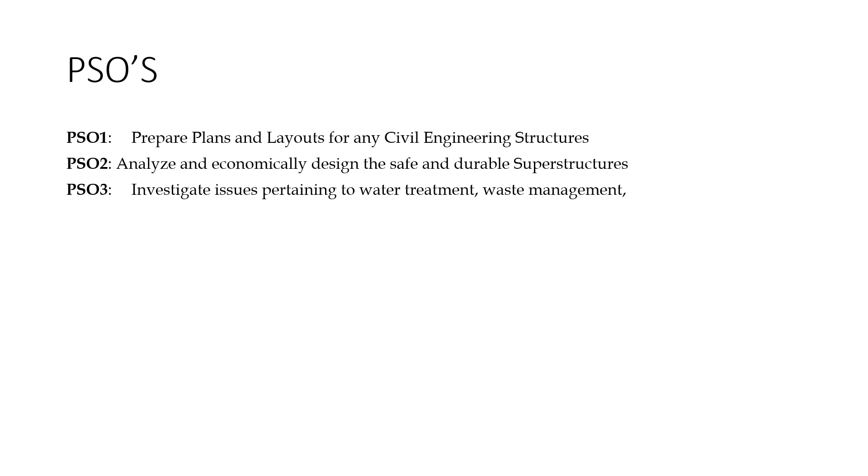Next one, investigate issues pertaining to water treatment and waste management. If you go through the curriculum, most of the subjects come under any of these three categories. So we have included water treatment, waste management related subjects in PSO.

Next one, coming to our subject 22 CEC 61, structural analysis 2. The course objective is analyzing determinate and indeterminate structures using ILD, and analyzing the arches, cables, suspension bridges and plastic analysis. So we can identify the three major divisions. First one, analyzing determinate and indeterminate structures using ILD.

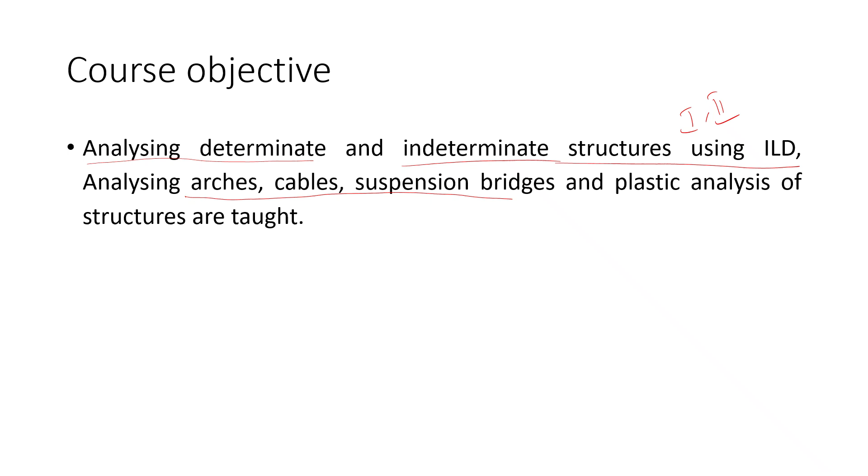So the first and second units will deal with ILD, and the third and fourth units will deal with arches, cables and suspension bridges. So these three components come under a single heading. And the fifth unit will be the plastic analysis of structures. So we can divide it into three major parts.

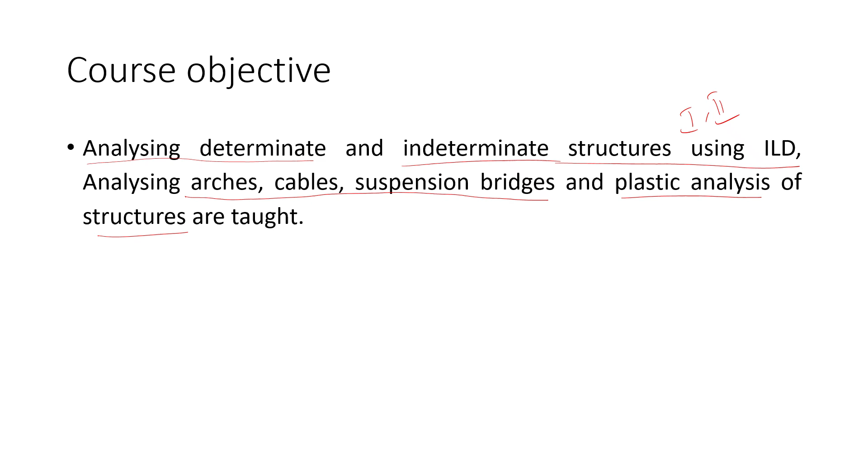Next one, course outcomes. In these course outcomes, you can identify that CO1 to CO4 will be related to any one of the units, and CO5 is not related to a particular unit. By solving the problems, we can give some seminars and it can be evaluated internally.

CO5 is going to be evaluated internally, because if you look at CO1, summarize the concepts of ILD for determinate and indeterminate beams, also summarize the concept of arches, cables and suspension bridges. If you look into the question paper, you can relate CO1 to any unit. In the previous system, we had unit 1 as CO1, unit 2 as CO2, unit 3 as CO3, unit 4 as CO4, unit 5 as CO5.

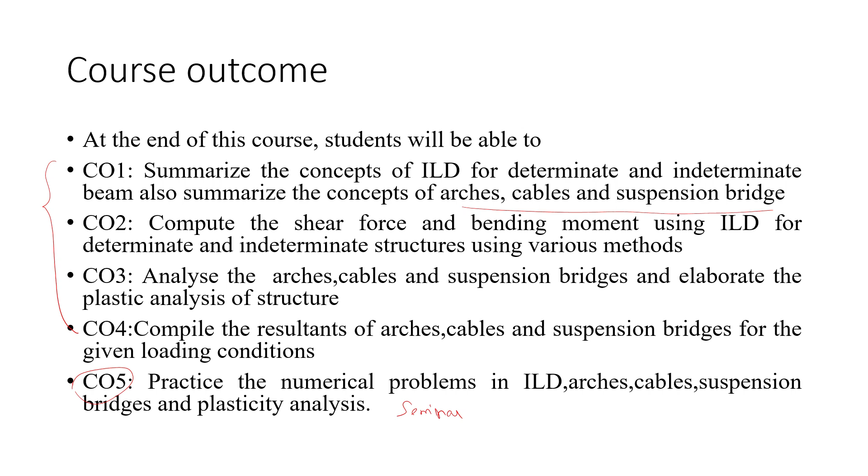But from now onwards, we have changed a lot in the question pattern. So units 1 to 5 will consist of any one of CO1 to CO4. It will not consist of CO5 because it is going to be internally evaluated, but nothing more different than that. The first unit is influence lines for determinate beams.

So only statically determinate beams we are going to consider, only simply supported beams. Next, one part will have an overhang or both parts will have overhangs, with different loading conditions. Actually, this concept deals with moving loads. The load is first in this position, next it moves to the next position, and it further moves to this position. So the load is not considered to be static at a point.

Actually, I am hanging the load above the beam. I am not placing the load over the beam. I am hanging the load over the beam. That is, I am considering that the load is moving from left to right or right to left. And generally, for our comfort, we consider the load moving from left to right.

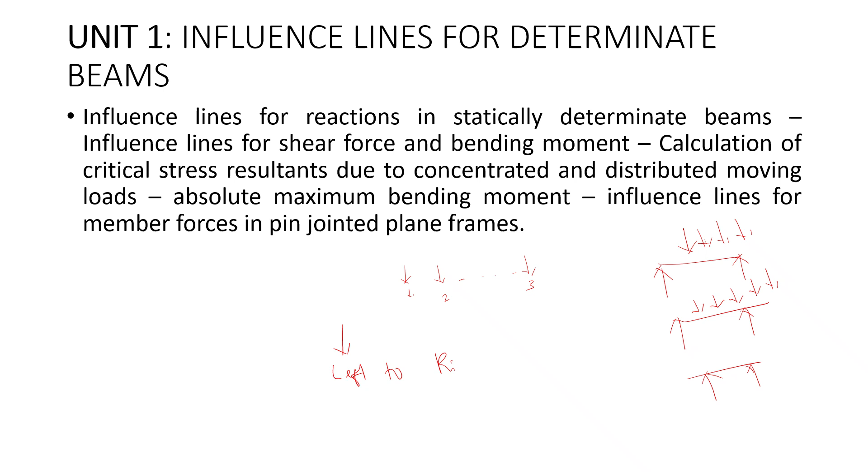That is, if you are considering a bridge, a vehicle is traveling from left to right, and it has a number of wheels. Each wheel is considered to be a point load. Initially this truck will be here. Finally, the truck will leave on the right side.

The wheels are located like this, and the load is applied on each wheel as the axle load. So here it is entering, here it is leaving. So the load direction is from left to right side. So this loading condition is considered to be multiple point loads moving from left to right side of the bridge.

This point load may not be the same in magnitude. Here it can be 50 kilonewton, next one 60 kilonewton, next one 80 kilonewton, next one 20 kilonewton, and next one 20 kilonewton. Why am I giving a lower value of 20 kilonewton compared to the others? Because the material is loaded only at this part. So this point load will have lesser application of load compared to the backside wheels. So I am approximately giving a lesser value for these wheels. So this load is coming as multiple point loads.

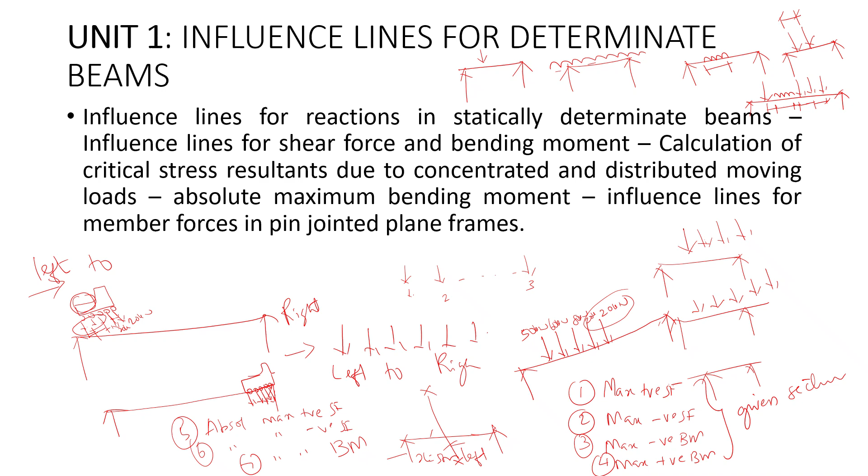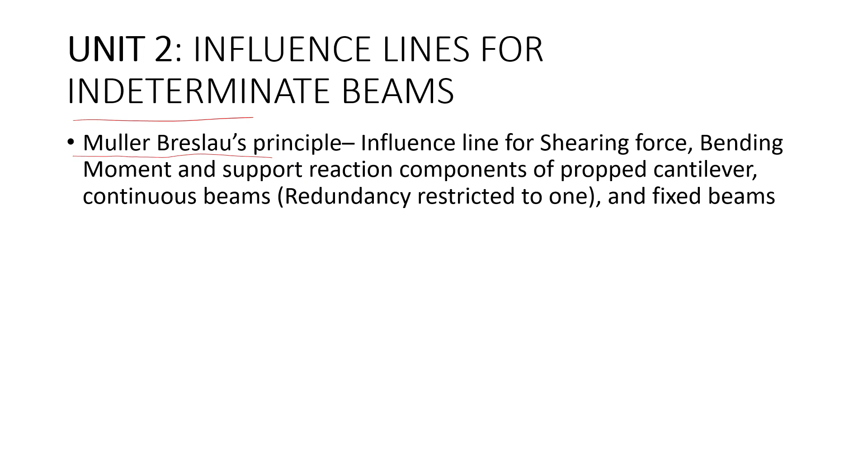So with this introduction, I am moving to the next unit. So this is also ILD, that is for indeterminate beams. So normally the indeterminate beams require some new concept or new principle. So here Muller-Breslau principle is used, and for this if you are taking a propped cantilever, it is an indeterminate structure. So we are going to remove this reaction and we are going to apply 1 kilonewton load in the same direction, and we are going to have some integration in this unit,

and we are going to draw the ILD diagram. So in unit 1 also we are going to draw an influence line for shear force and bending moment diagram. So influence lines mean that here I am considering 50 kilonewton load and I am going to draw the shear force diagram like this. This is negative diagram, this is positive diagram. In the influence line, we are not going to deal with 50 kilonewton. We are going to deal with 1 kilonewton load, and we are going to estimate the same positive and negative shear force at this section

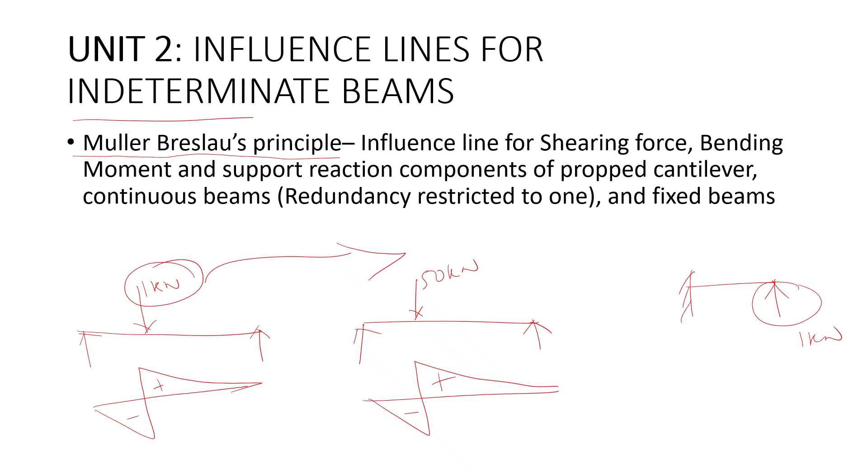with this 1 kilonewton. So it is very easy for the calculation for the design engineers dealing with 1 kilonewton rather than 50 kilonewton. So that is the ILD concept, influence line concept. This is very simple for design engineers, so it is mostly adopted. So in moving load concept, we are going to apply 1 kilonewton instead of actual loading, and finally we are going to multiply the 50 kilonewton at the last step. So we will see one by one while having further lectures.

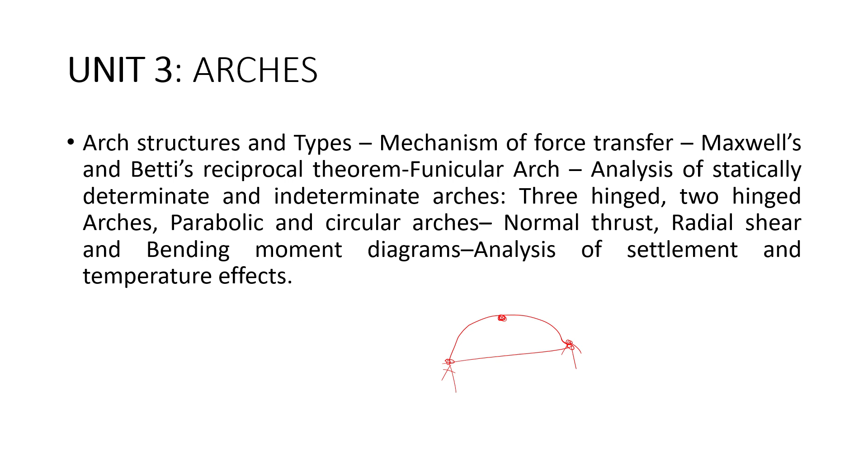Next one, arches. Arches, you already know it is an arch profile. Arch profile will have 2 hinged arch at the supports or 3 hinged arch. It is having some additional hinge at the crown point, and calculating the bending moment and shear force, radial shear and normal thrust also can be calculated. So this is all about the arches.

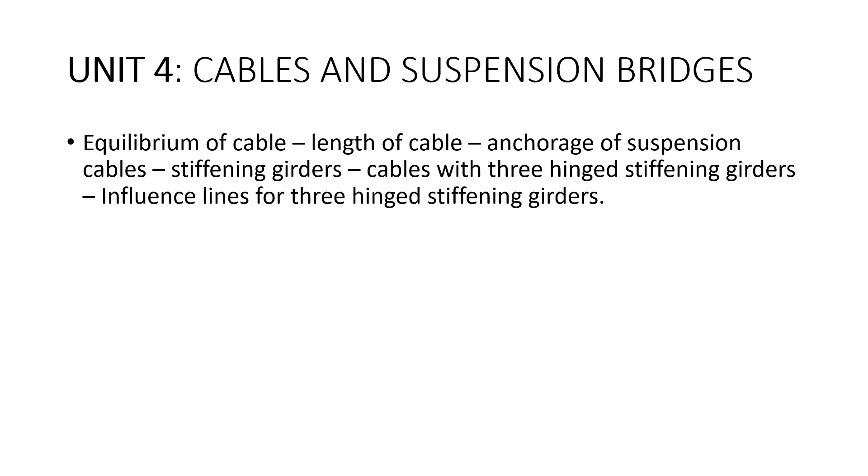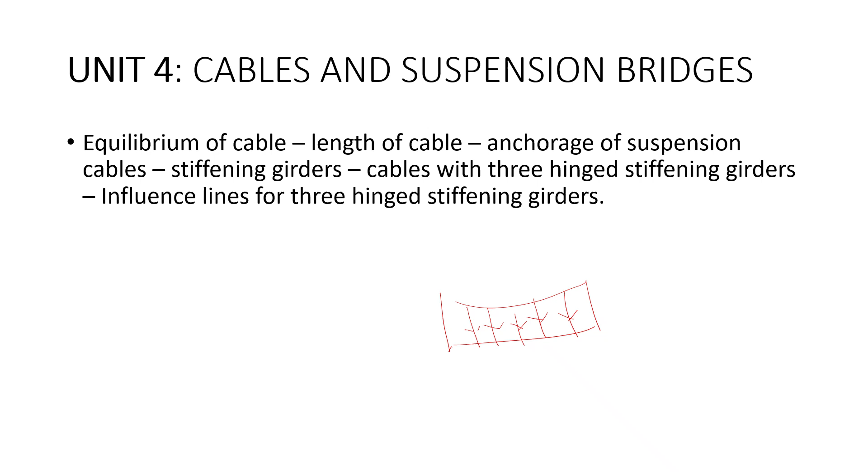Next one, cables and suspension bridges. So we know the suspension bridges are tied with the cables. So each cable will have some tensile force. So we are going to analyze with the different support conditions and calculating the bending moment values.

Next one, plastic analysis. It is completely different from normal analysis, because from strength of materials, mechanics of solids, all analysis problems we are assuming that it is elastic. All the conditions are within the elastic limit. Beyond that, we have one region while we are testing the mild steel. This is the elastic limit where the stress is proportional to strain, Young's modulus, and further this is the plastic region. Before collapse we will have some strain hardening portion. If it is stress, here it is strain.

Basically the stress is increased with the particular strain value. Both the ratios are same within the elastic limit. Beyond this point, the stress is not increasing. The stress is limited, but the strain is increasing. Sudden collapse will not occur. The strain is increasing and it gives some warning. So this portion is called strain hardening portion. So this portion is also called plastic region.

Plastic region comes after the formation of some hinges, because the hinge allows enormous rotation at any point. So this enormous rotation will lead to collapse. So at this point the structure will collapse. So from the linearity point to the collapse, we have the plastic region. So here we can calculate maximum collapse load. Up to this point we will talk about the yield load or yield stress. Here in this region we have to calculate maximum collapse load or ultimate bending moment. We have two theorems, upper and lower bound theorems, to calculate this.

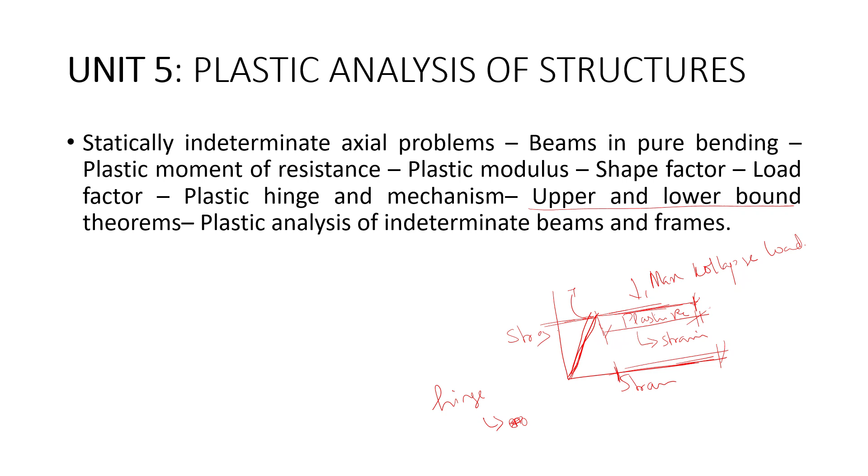Next, CO2 is mapped with PO1. Actually this should be mapped with PO2 only, because PO1 is engineering knowledge. Always we are applying engineering knowledge. So CO2 is mapped with PO1, further CO3 PO2, CO4 PO3, and CO5 by giving seminars, PO9 communication can be employed, and PO10 and PO12 lifelong learning. Here teamwork can be mapped in CO5. So this CO5 can be evaluated internally. It will not be asked in examination.

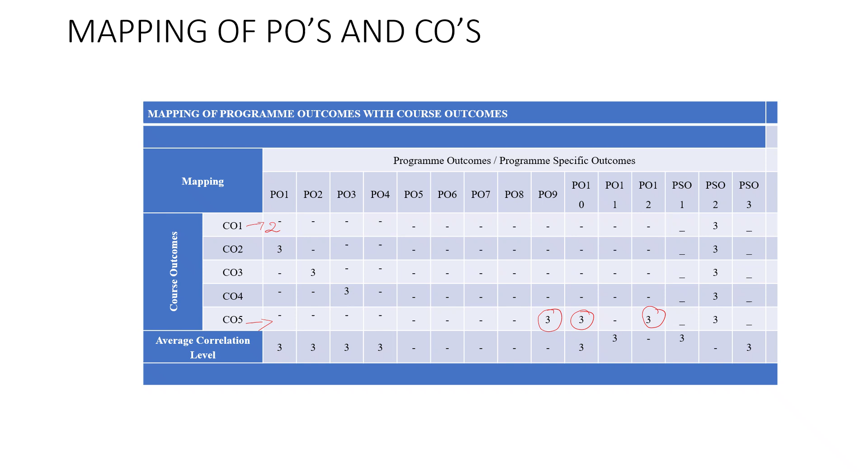Okay, thank you. So with this introduction, we will move on to the further lectures.